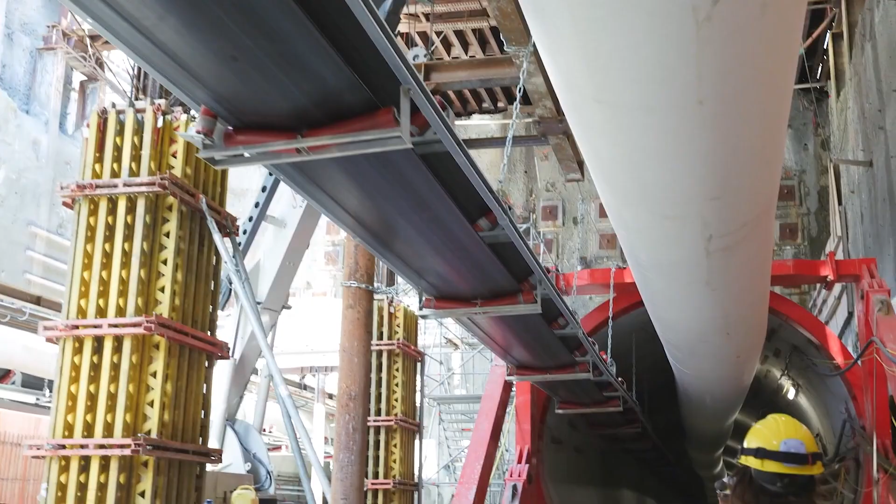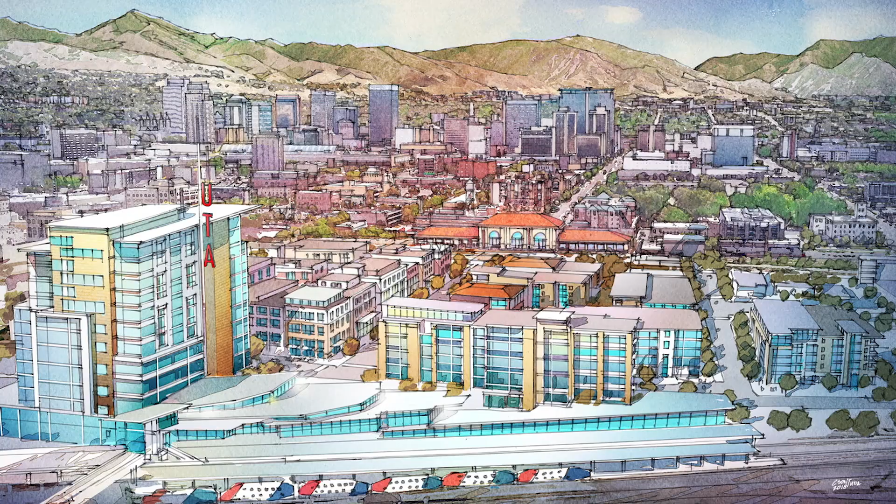In Canada, a massive subterranean endeavor is underway, poised to revolutionize one of its major urban centers. Vancouver, amidst a housing crisis and bracing for a surge in population, is witnessing the implementation of a $2 billion subway line. This ambitious project, slated to usher in extensive urban development, including an entirely new downtown district, is pushing engineering boundaries to the extreme.

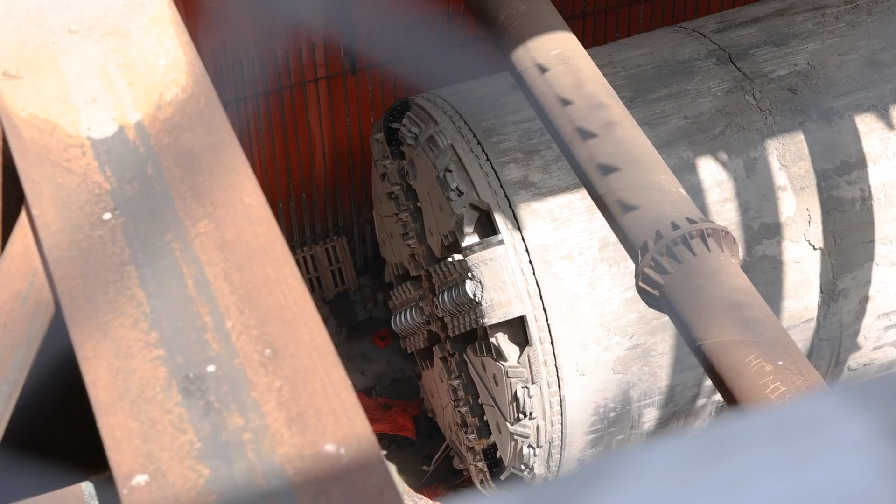From navigating challenging tunneling routes to constructing new stations along bustling thoroughfares, the scale of this megaproject demands groundbreaking engineering feats. Vancouver, often hailed as one of the world's most livable cities, boasts unparalleled natural beauty, nestled amidst mountains, bordered by the ocean, and adorned with picturesque urban parks. However, amidst its allure, the city grapples with the harsh realities of a housing market out of reach for many. Aspiring residents face daunting challenges in securing affordable housing in this vibrant metropolis. Indeed, Vancouver faces the paradox of being a highly livable city with insufficient housing options.

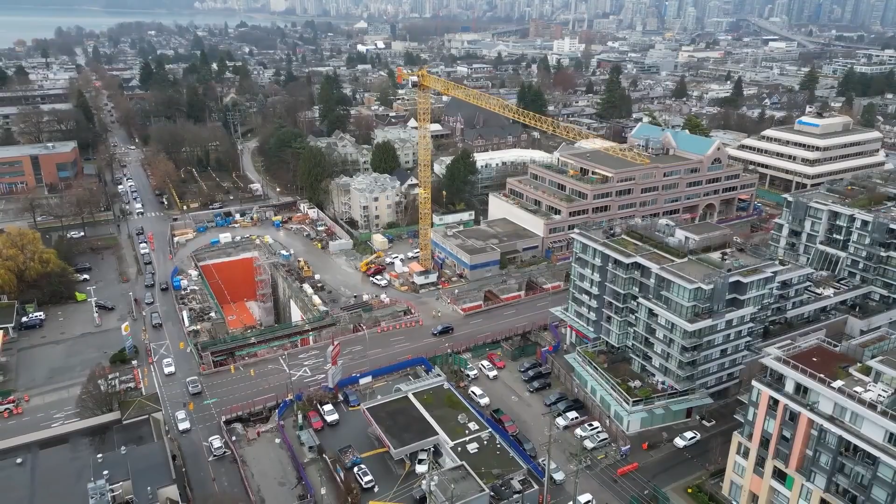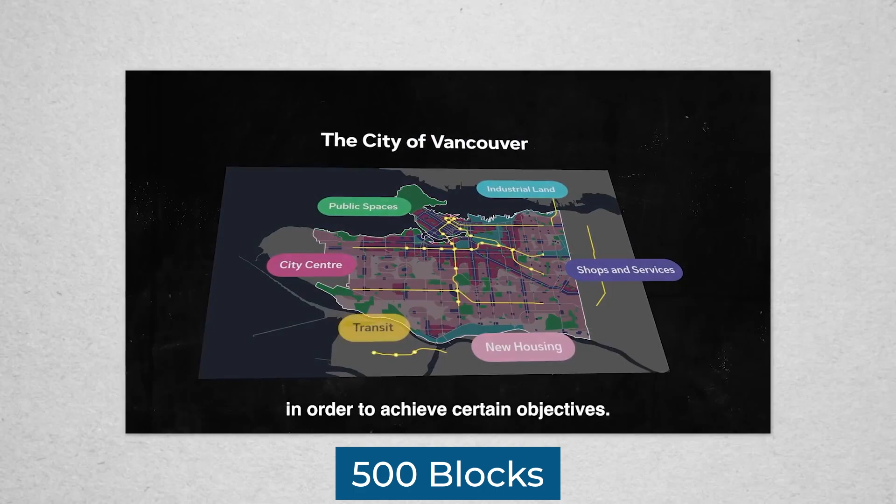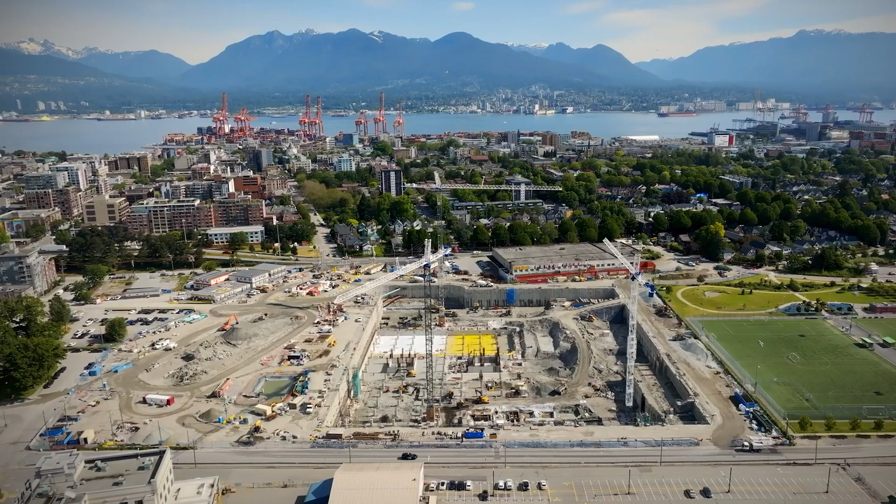This challenge is compounded by the projected influx of an additional million residents by 2050, necessitating the creation of 500,000 more residences and employment opportunities. The Broadway corridor, ranking as the second largest employment hub in British Columbia, primarily consists of low-density housing with inadequate office space to satisfy the growing demand. In response, the city government has proposed an ambitious plan to densify this area significantly, spanning nearly 500 blocks, introducing tens of thousands of new residences and employment opportunities to address the pressing need for housing and jobs in the region.

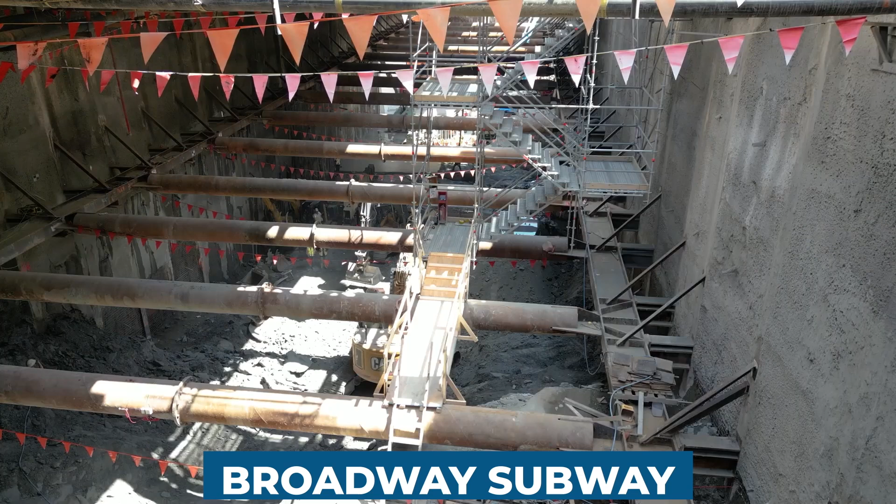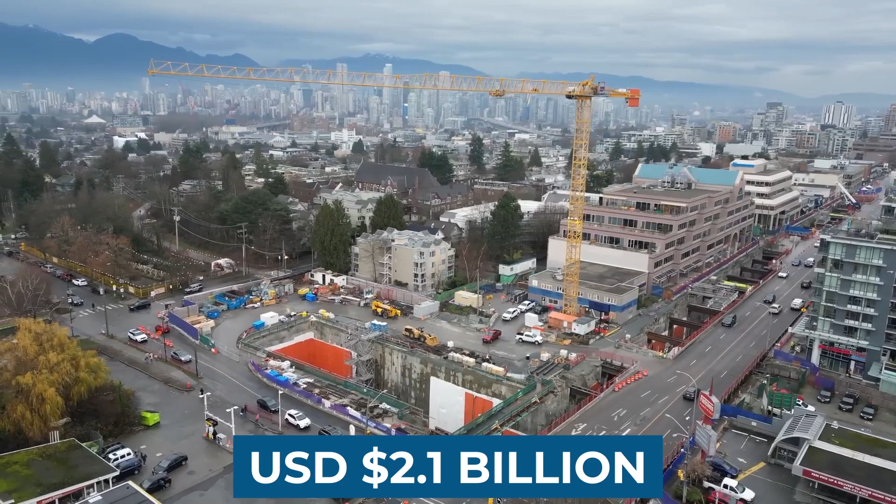Before the grand vision of transforming the Broadway corridor into a vibrant urban center can be realized, a crucial step must be taken: the construction of the remarkable Broadway subway. This groundbreaking project, currently underway beneath the city's surface, is set to carry a price tag of CAD 2.8 billion, equivalent to USD 2.1 billion.

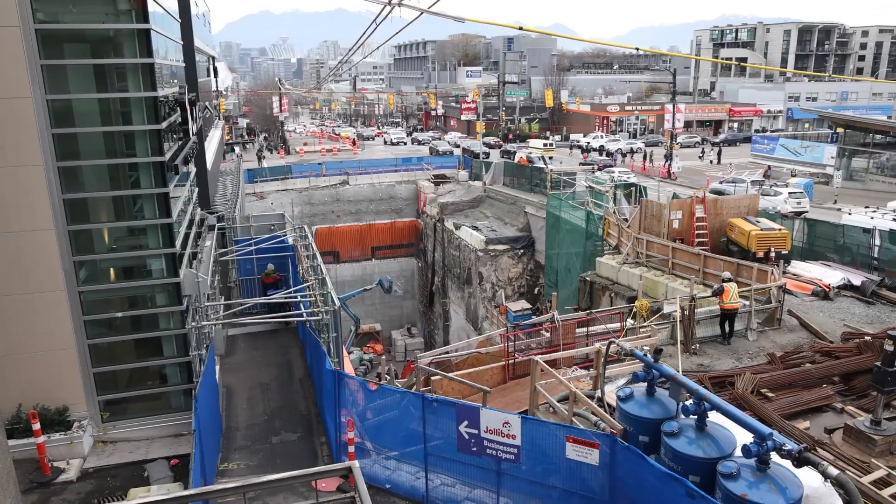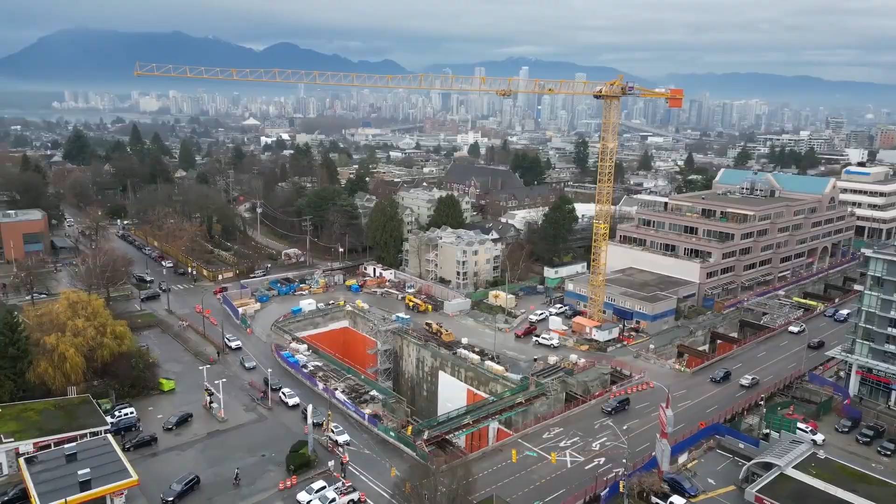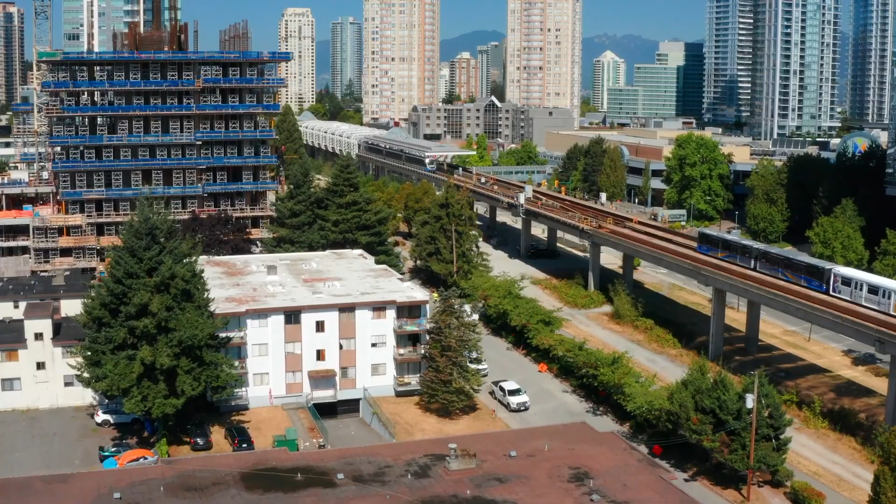Serving as a significant extension of Vancouver's SkyTrain light rail system, which has been serving the city since the mid-1980s, the Broadway subway holds the promise of alleviating strain on the heavily burdened bus network, a primary mode of transportation for many residents. However, the subway's significance extends beyond mere transportation. It is envisioned as the linchpin for the ambitious high-rise construction plans that are poised to reshape the city's skyline. Until the subway becomes operational, the realization of these lofty development aspirations remains contingent upon its successful completion.

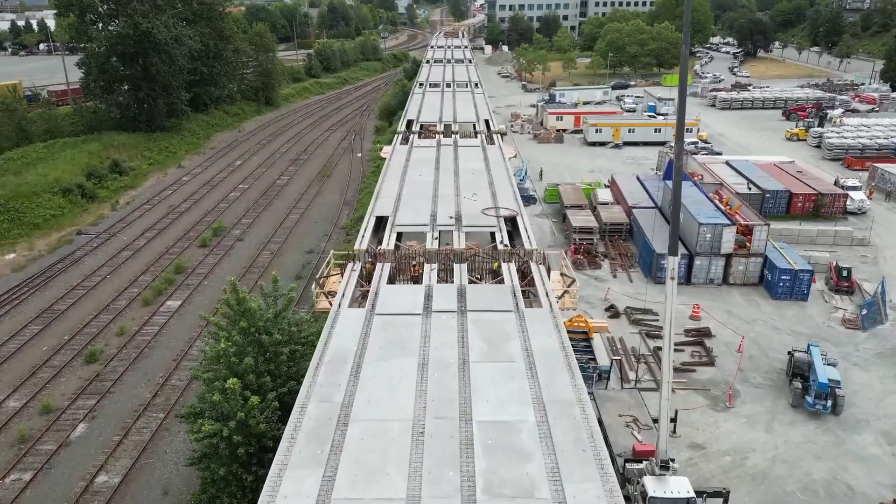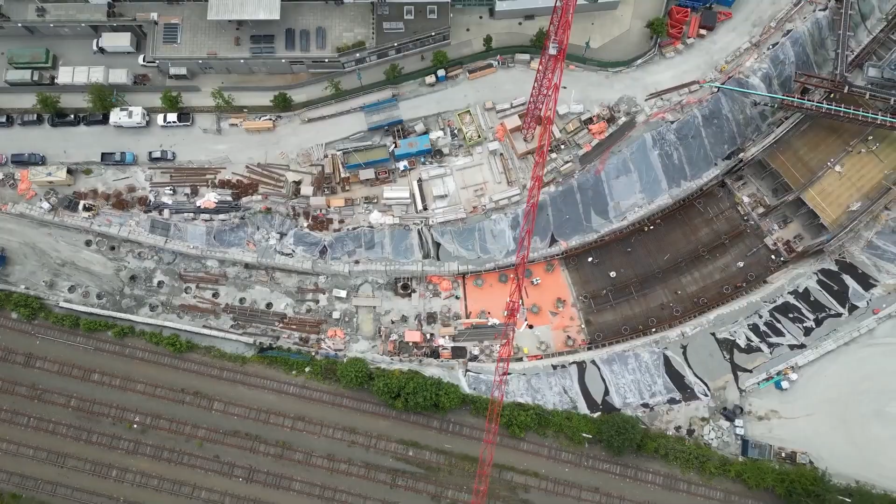So, what exactly does this monumental project entail? The Broadway subway project encompasses several key components aimed at enhancing Vancouver's transportation infrastructure. This includes the construction of 6 new underground stations, the creation of 5 kilometers of twin-bore tunnels, and the development of an elevated guideway, or viaduct, to link the new line with existing infrastructure.

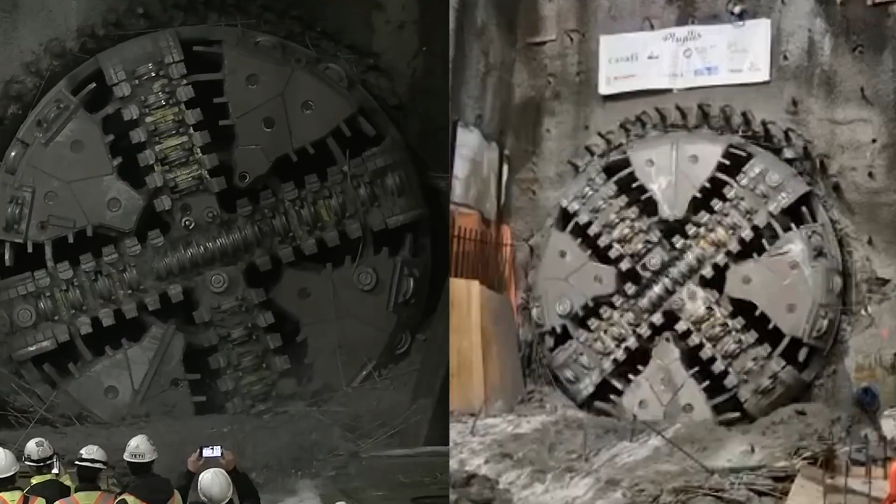The elevated guideway, spanning 700 meters, is supported by 21 pillars and over 100 concrete beams, each measuring 30 meters in length and weighing nearly 40 tons. This structural marvel will seamlessly connect passengers from the current terminus of the Millennium Line at VCC Clark to the inaugural underground station at Great Northern Way.

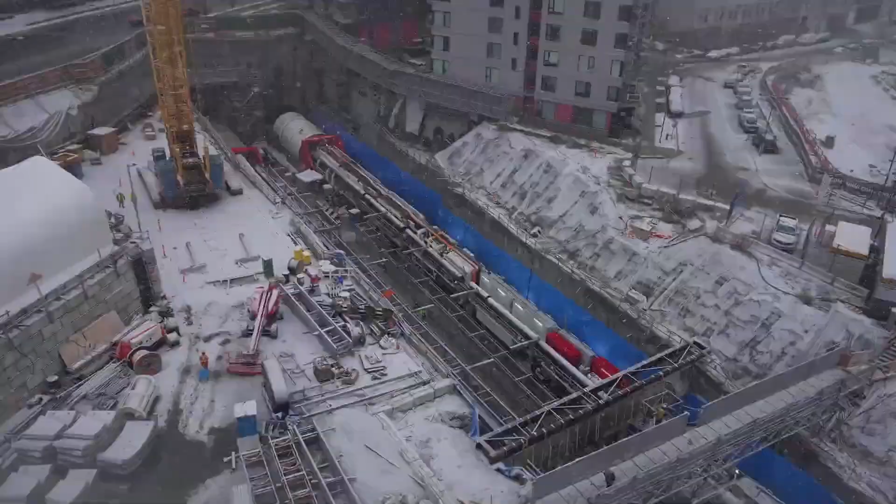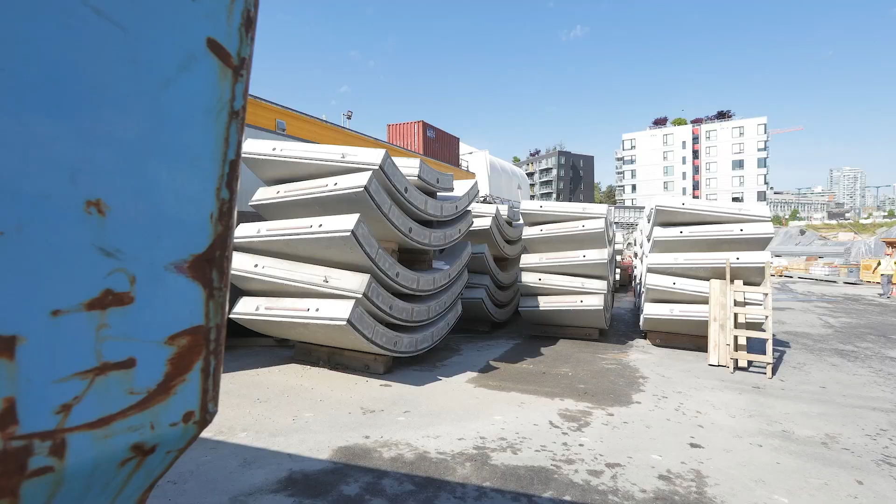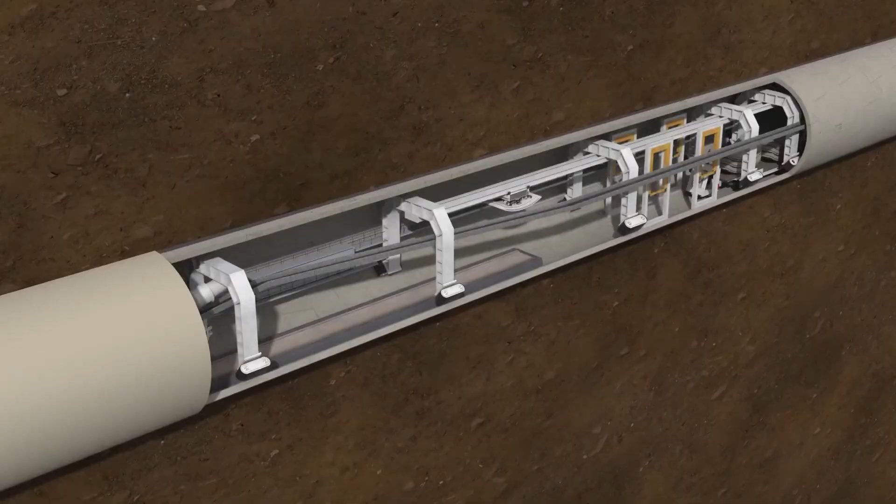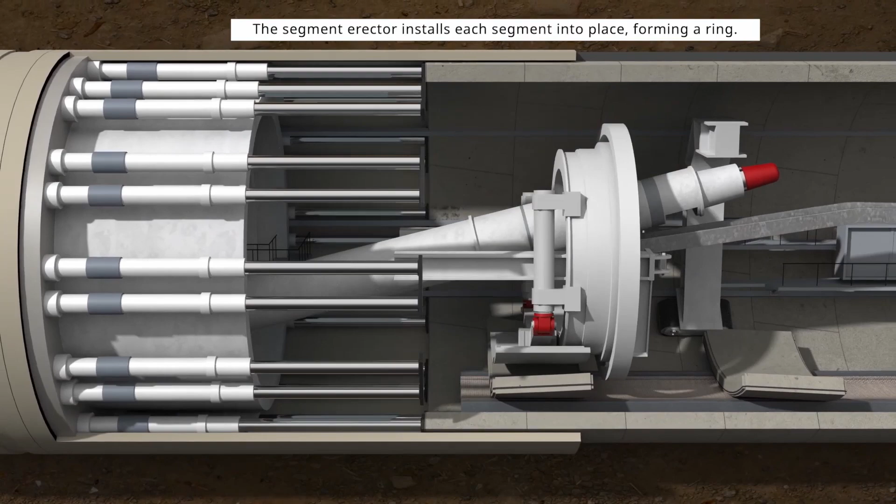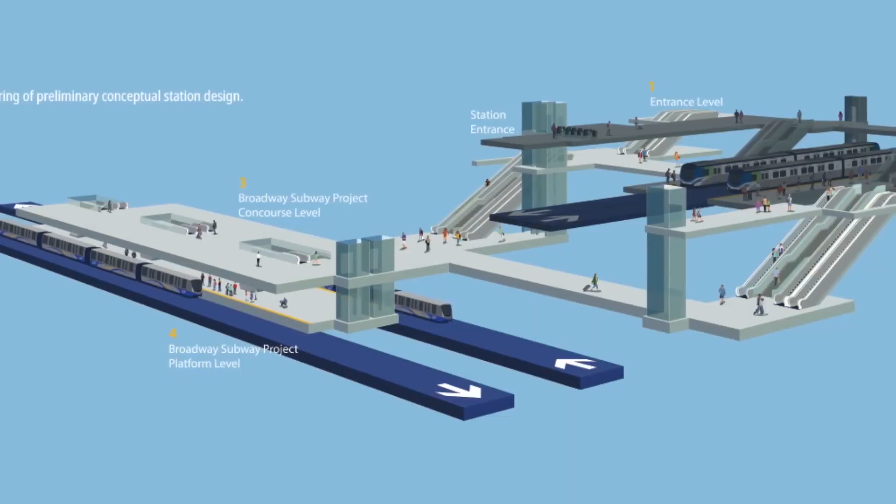Once the tunnel boring machine completes its excavation, it must install thousands of rings to reinforce the tunnel lining, a painstaking process that underscores the meticulous nature of underground construction. To facilitate the installation of tunnel segments, specialized vehicles transport them through the tunnel to the tunnel boring machine. Once delivered, a crane lifts the segments onto a conveyor belt, which carries them up to the TBM.

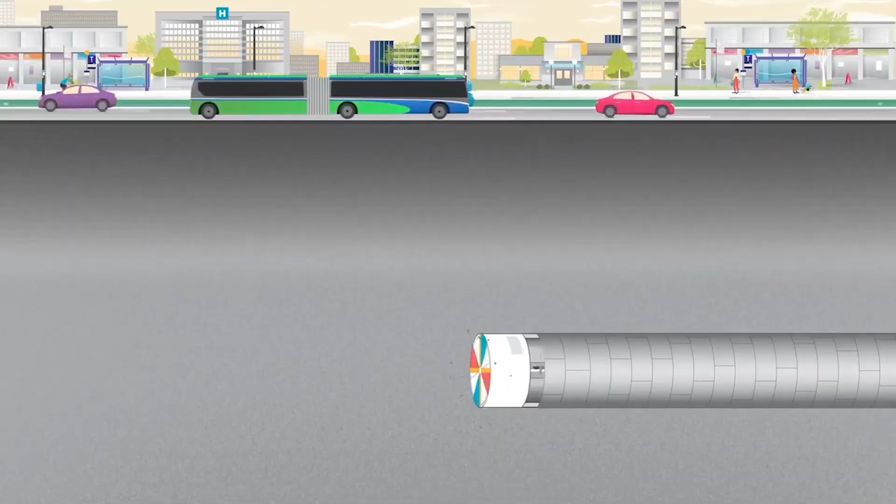These segments are then meticulously arranged to form a complete ring, which the machine utilizes to advance forward, burrowing through the earth at a rate of up to 18 meters per day. At one juncture, Phyllis had to tunnel to a depth of 22 meters to navigate beneath the Canada Line, another subway tunnel traversing the same area from north to south.

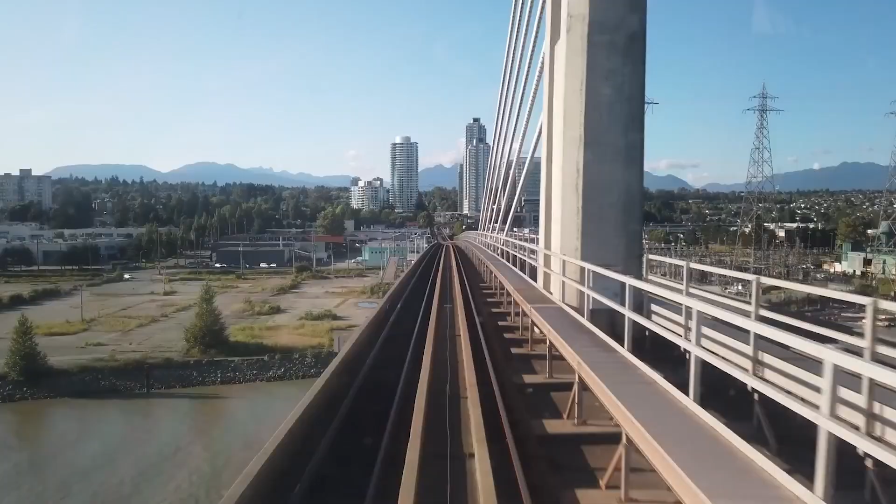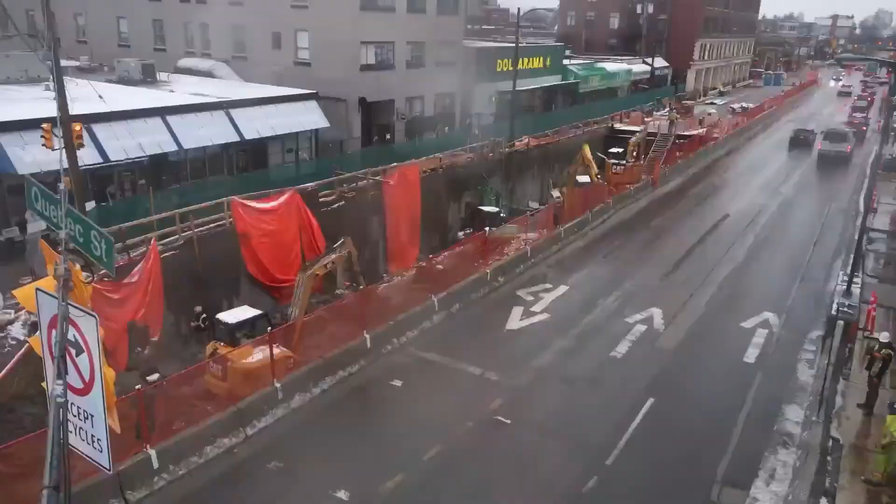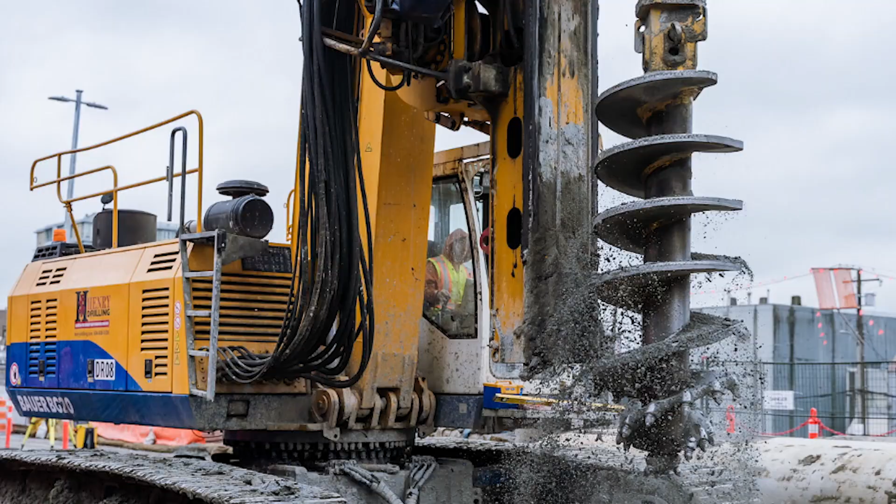Upon reaching Cypress Street, adjacent to the final station, both TBMs will undergo dismantling and removal. While the excavation process may seem time-consuming, the resulting benefits will drastically improve transit efficiency. Acciona, one of the project's main contractors, asserts that traversing the entire new line will take a mere 11 minutes.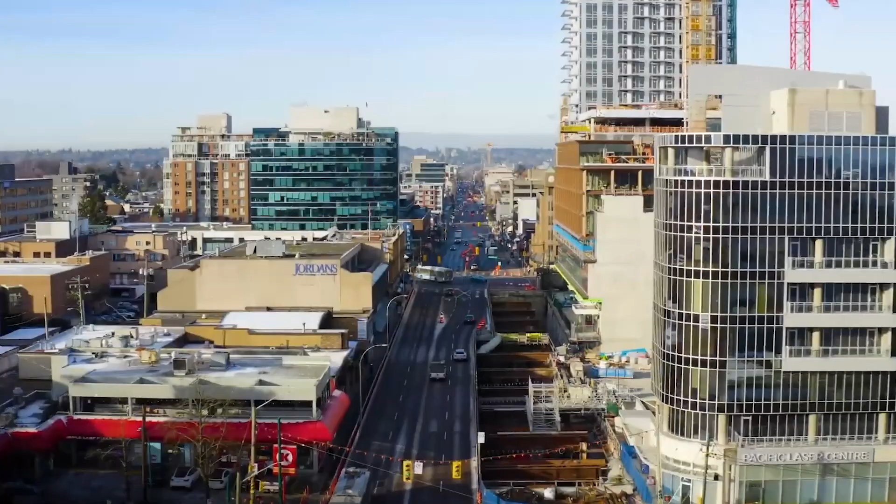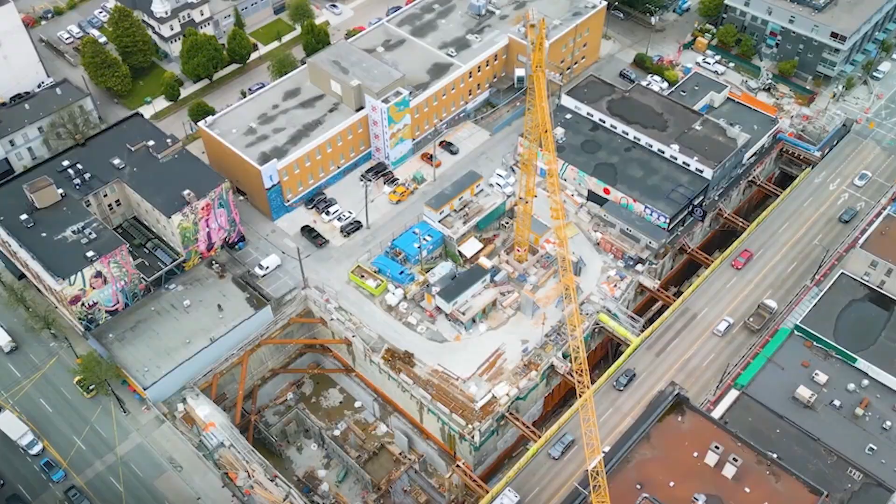Offering the average commuter a substantial daily time savings of approximately half an hour. Despite the extensive construction activity underground, efforts are made to minimize disruption above ground. Temporary decks are being constructed along Broadway to ensure that one half of the street remains open to cars and buses, thereby maintaining traffic flow throughout the construction period. To facilitate the construction of these temporary decks, massive drills are employed to create 20-meter deep holes for the columns that support the structure.

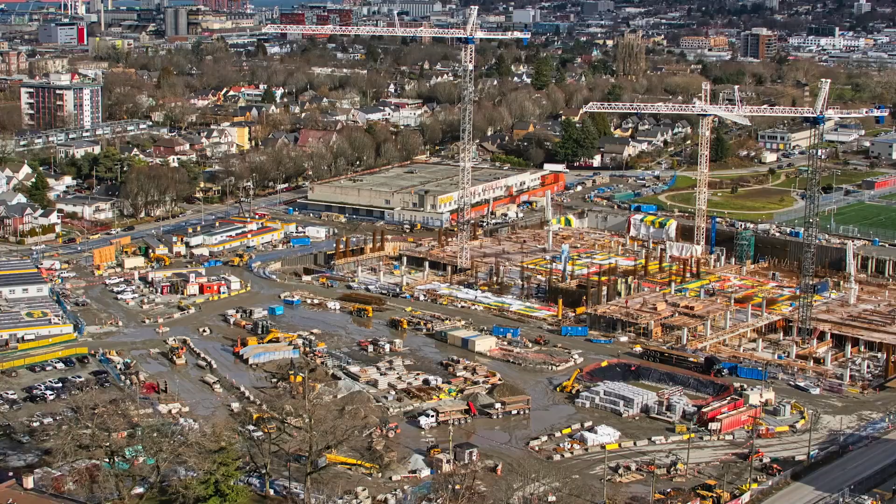Subsequently, the road undergoes excavation to accommodate the placement of girders and deck panels, resting on concrete pads. Once the deck is installed, traffic resumes, allowing work to progress beneath the surface before repeating the process on the opposite side of the street. Additionally, designated work areas and storage spaces have been established adjacent to the station sites, necessitating some building demolitions but effectively keeping construction activities away from the main thoroughfare.

However, as is common with large-scale infrastructure projects, there have been challenges. Some businesses, particularly in areas like Mount Pleasant, have experienced a decline in foot traffic or have closed altogether, attributing their struggles to the ongoing construction.

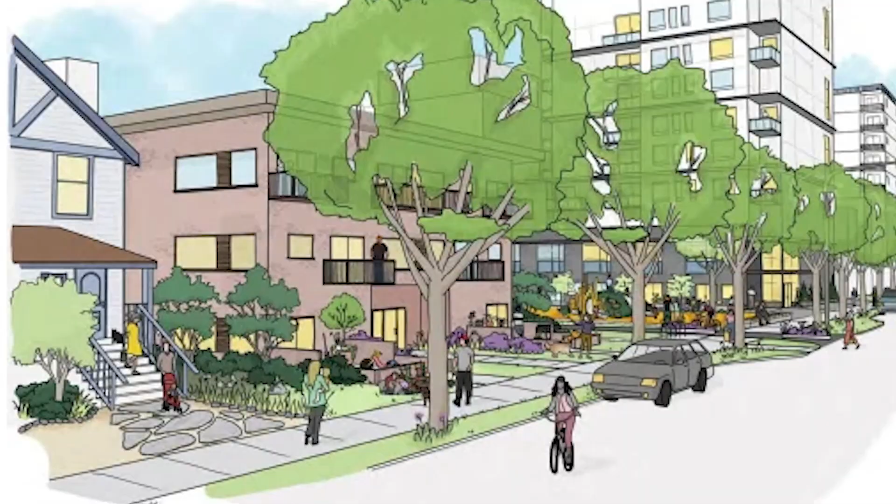Additionally, workers associated with the project have faced their own hurdles. Over 100 concrete plant employees initiated a strike in 2022, impacting the supply of essential materials throughout the region. This disruption delayed the start of tunneling, subsequently pushing back the overall completion timeline from 2025 to 2026.

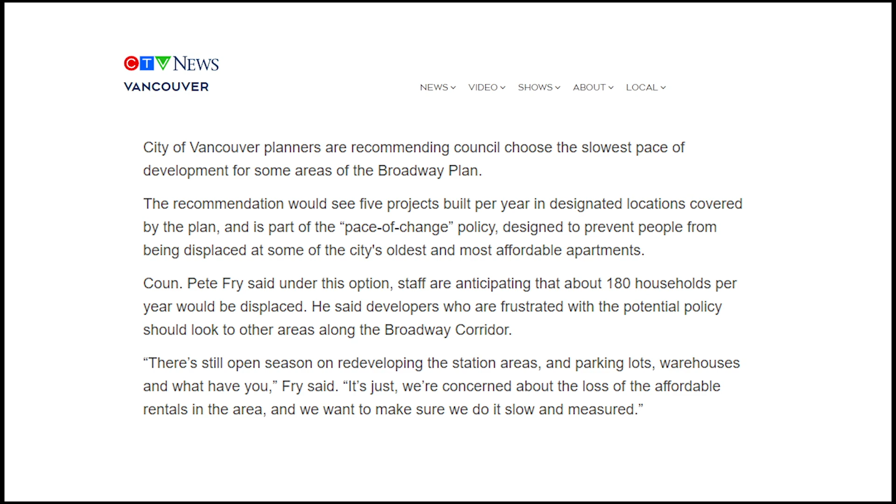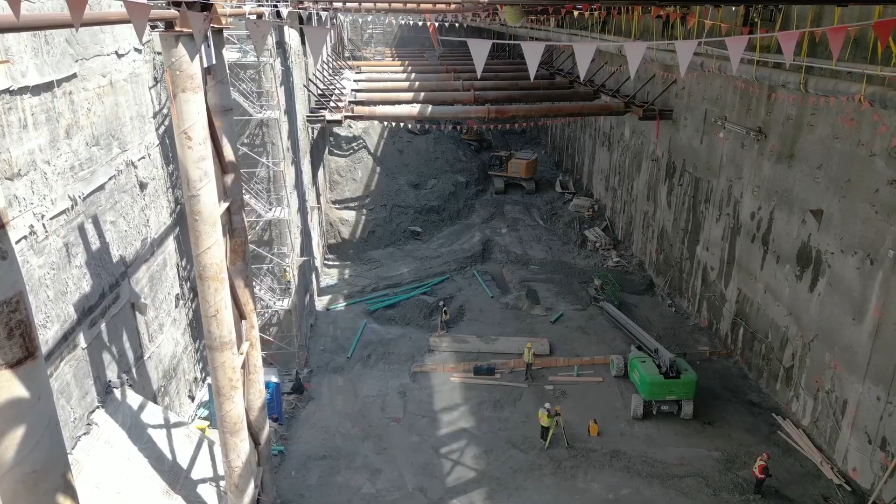Despite these setbacks, once the project reaches fruition, Vancouver residents can anticipate a significant transformation in the Broadway skyline as construction commences on the ambitious Broadway plan. Vancouver's proposal to establish a second downtown by replacing low-rise buildings with high-rises has sparked debate. While such a plan could create additional space for both residential and commercial purposes, concerns have arisen regarding its potential impact on current residents and businesses.

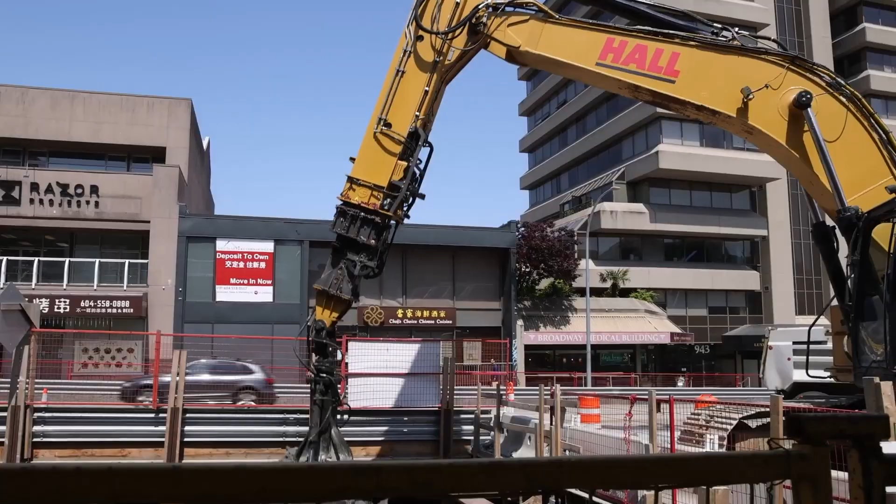In early 2023, a proposal emerged to mitigate the displacement of renters as a result of the redevelopment. However, the City Council rejected this proposal out of fear that it could impede much-needed development progress. Nevertheless, measures have been put in place to support those who must vacate their homes, offering them an alternative rental at the same rate, and providing the opportunity to return to the new building without incurring additional costs.

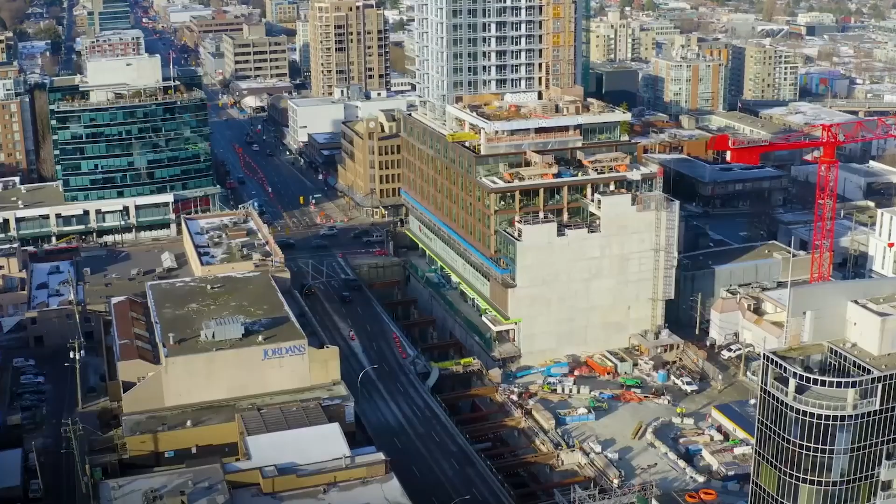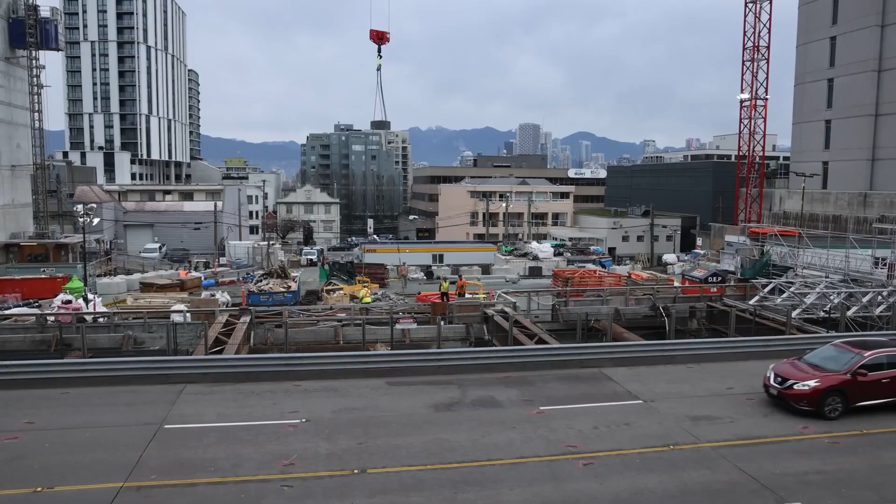As the construction of the subway and the implementation of the Broadway plan are still underway, further opposition and challenges may arise in the future. Balancing the needs of existing communities with the goals of urban development will likely remain a contentious issue moving forward. As we've witnessed with numerous construction projects in the past, some level of disruption is often unavoidable, particularly when infrastructure and real estate development are combined.

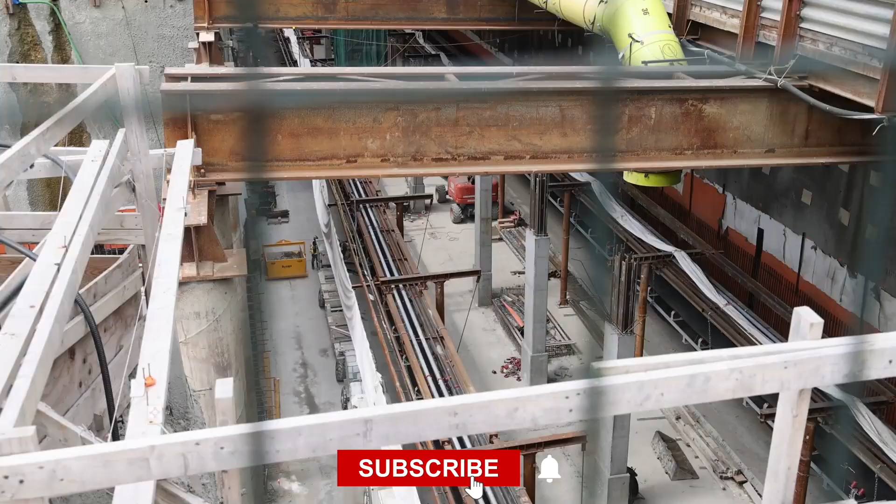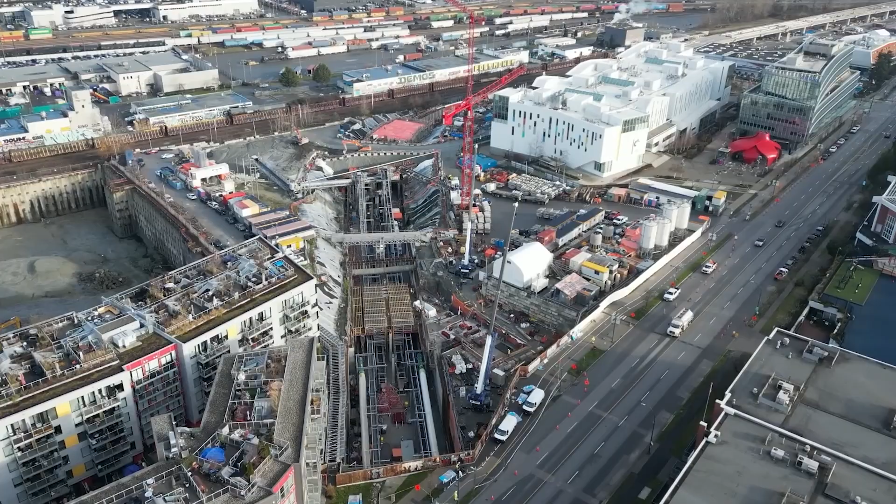However, history has shown that such projects tend to yield long-term benefits, even for those affected during the construction phase. Hopefully, the same will hold true for Vancouver's current endeavors. Over the next 3 decades, Vancouver's bustling Broadway corridor is projected to experience even greater activity, necessitating an efficient transportation system. While the new subway may not garner universal acclaim and not everyone may fully appreciate the remarkable engineering behind it, it represents a crucial investment in the city's future.

Ultimately, this project has the potential to transform Vancouver into a truly livable city, one where residents can thrive for years to come.